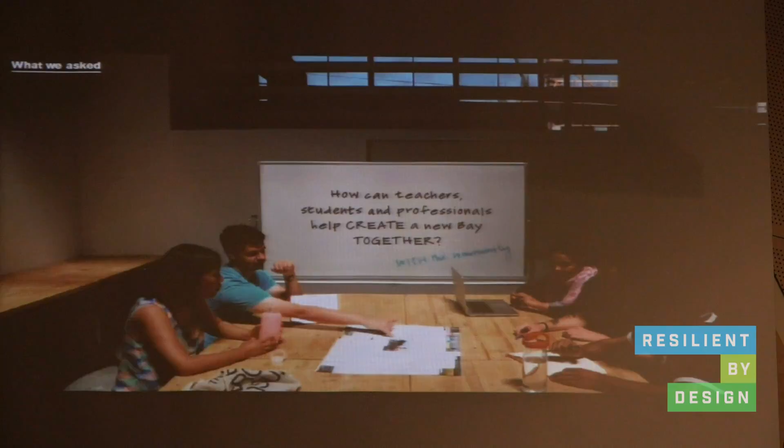And how can we do this together between teachers and students, professionals, and the communities? All of these questions, we want to dig deeper on those.

As part of the phase one touring and meeting with experts, we heard some amazing quotes along the way that, as we have our work sessions, we keep coming back to: a couple of big ideas that there is no shoreline, rather a shore zone. And we're a low-income community, and so the sad irony is that it's not our water, but it's flooding our homes. Those are really incredibly compelling ideas that have stuck with us and keep coming back to us.

So what do we do with those? We have been working in the studios and in the offices, in the neighborhoods.

Ultimately, though, we think it's not going to be any one profession, not any one community, nor any one generation that will solve these challenges. So what we really believe is at stake here, or the really big opportunity, is to create a new way of thinking about our relationship with the Bay, that can inspire everybody to get involved.

And that led us to an idea. There's a lot of complexity to all of these issues, and at 4 o'clock today you've listened to a lot of presentations. So I want to try something we've been excited about, sort of how you simplify this down into an idea that can get everybody excited. Let me give that a try.

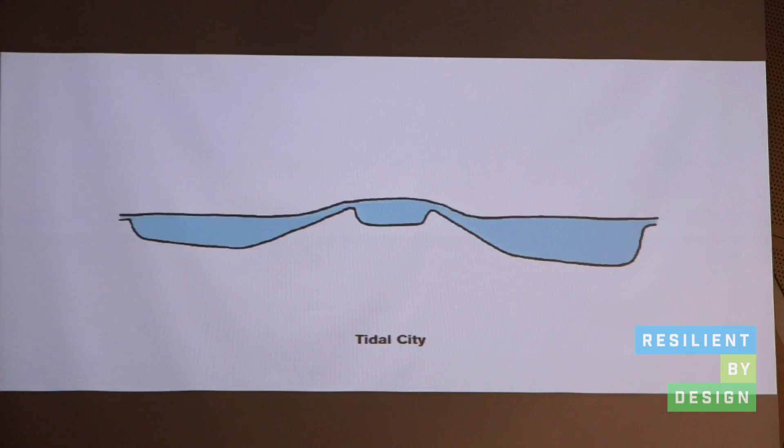So how do you live on the edge? What we're saying is that in a time of sea level rising, groundwater flood rising, we need to expand the edge of the bay to include both habitat and housing, for ecology and people living side by side. And we've asked ourselves how we can rethink the Bay Edge as a place where people and nature can coexist.

And then the second big idea is that in the 20th century in particular, we built these corridors to get us as fast as possible from point A to point B, and it ripped apart communities.

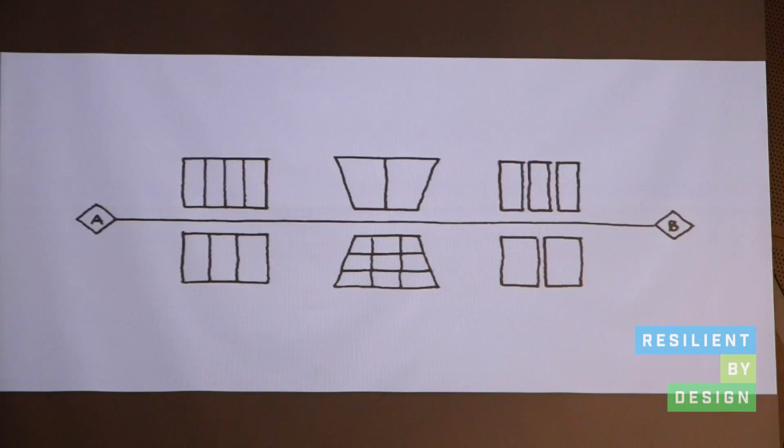What we want to do is rethink this. Right now we've got a huge challenge because all of those corridors have to be elevated and protected from flooding and seismic activities, and also modernized to accommodate new technology. So this is our once-in-a-lifetime opportunity to rethink those as a generator of jobs and housing, as a way to pull those communities together.

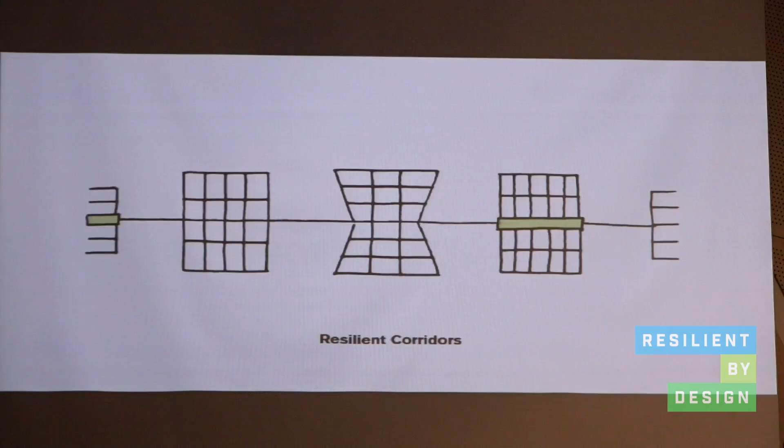So we call that big idea resilient corridors. The first idea was tidal cities. Second one is resilient corridors. And thirdly, it's an issue we've heard a lot about from different groups today.

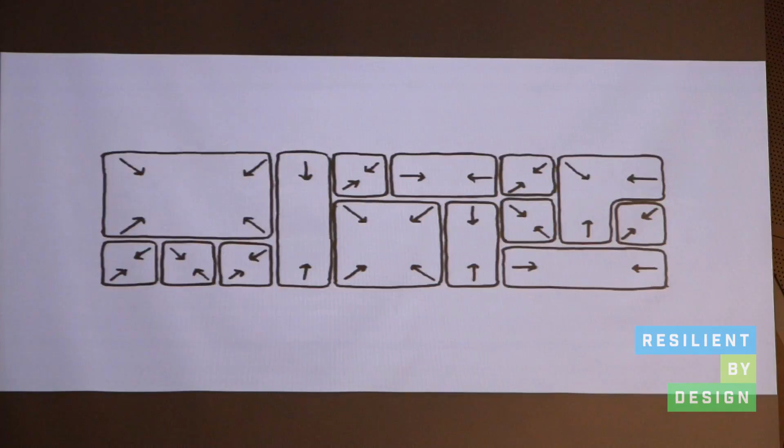Our take on it is that it's a governance issue. These natural and man-made crises don't respect the fact that we call one area a town and the other a city, or these municipal boundaries. But we and our policies do. So we need to think about new alliances among existing agencies and new partnerships between community advocates, residents, and stakeholders so that we can leapfrog these jurisdictional boundaries.

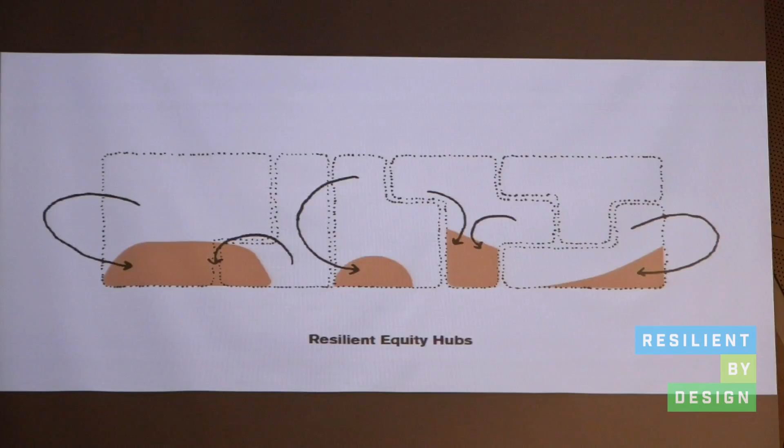And we call this idea resilient equity hubs. Now, all three of these are big, important ideas independently, but we really believe the real magic happens when we overlay them, and that's when we can transform our relationship to the Bay Edge and create amazing ways to stay and live on that edge rather than retreat or wall ourselves off from it.

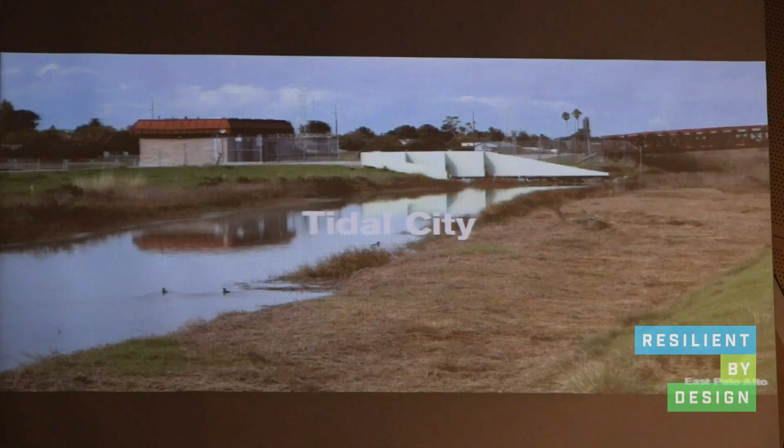This happens to be the pump house in East Palo Alto, which is pumping groundwater every day, whether it rains or not. We know that groundwater is going to be a big issue. We don't have a network of pumps that manages that for us—this is the exception, not the rule. So we're not ready for a higher water table, and we need to think about what that means.

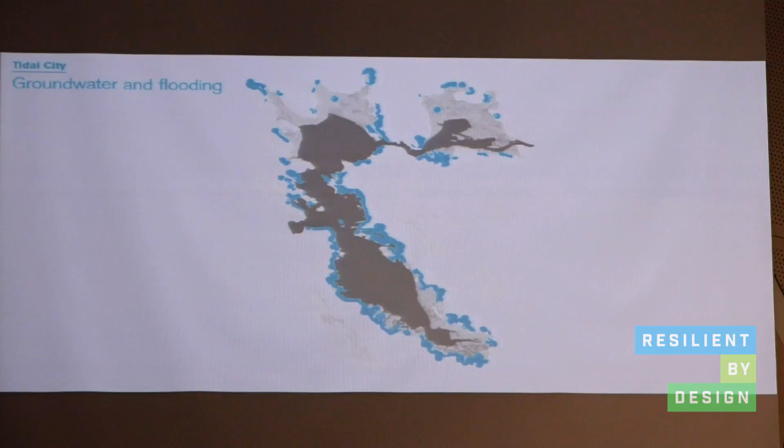So the research my group was doing at UC Berkeley was to map where there is a shallow water table in the Bay Area. This blue area on the map shows where the water table is within 6 feet of the surface, meaning that everywhere sea level rises 6 feet, all those blue areas would become emergent groundwater. That's a very serious problem—it would fill our pipes underground, expose buildings to mold, and could heave foundations. This is a very big deal in a region that hasn't had to manage this in the past.

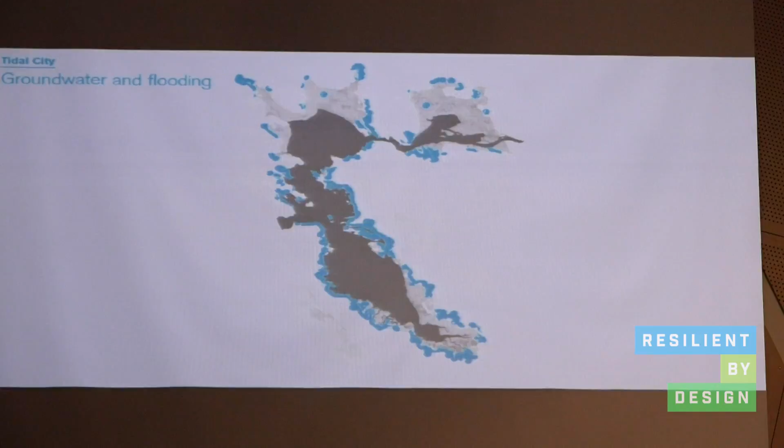It also increases our liquefaction risks. So in a seismic region, it's even more important that we understand how to deal with high water table zones.

So we looked for examples. We looked at Amsterdam and saw floating architecture. We thought, okay, this is something we could potentially use here in an innovative and different way, but using some of the same proven technologies.

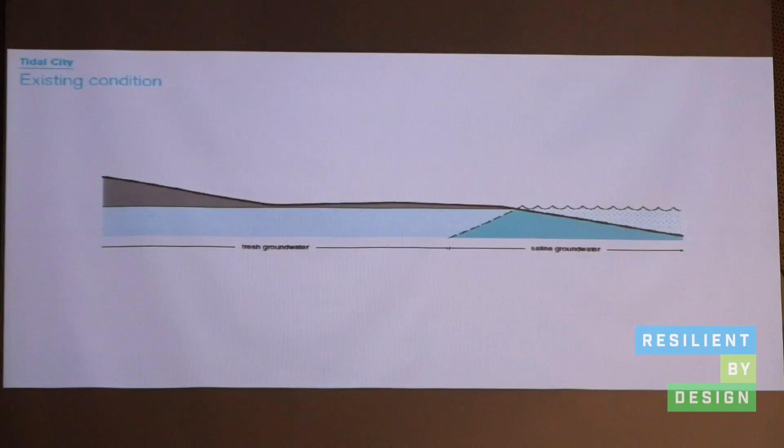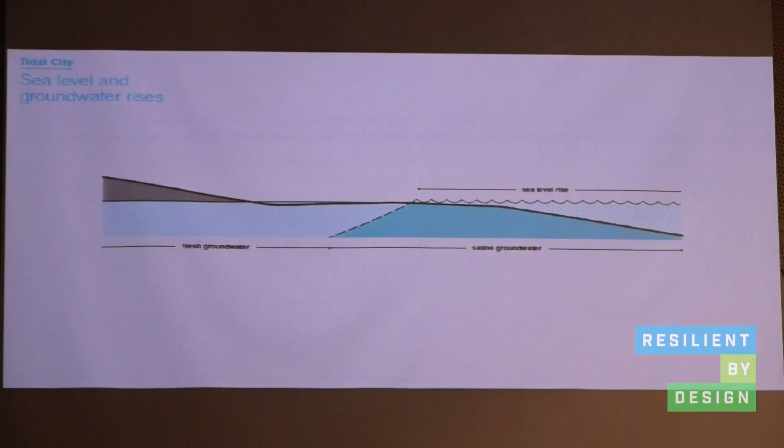The problem is, as I'll show in these sections, that as the sea level rises—dark blue is salt water and light blue is fresh water—we're going to see that light blue freshwater rise and eventually emerge on the land, even if we build levees and walls. East Palo Alto has a good levee, but still has groundwater flooding problems that the levee doesn't affect. So we need to figure out something that will allow us to address that.

One of the oldest ideas in landscape architecture is to dig a hole and make a mound. If we do that, we can balance our cut and fill locally and use the reshaping of the land as the primary strategy for how we continue to occupy these wet zones.

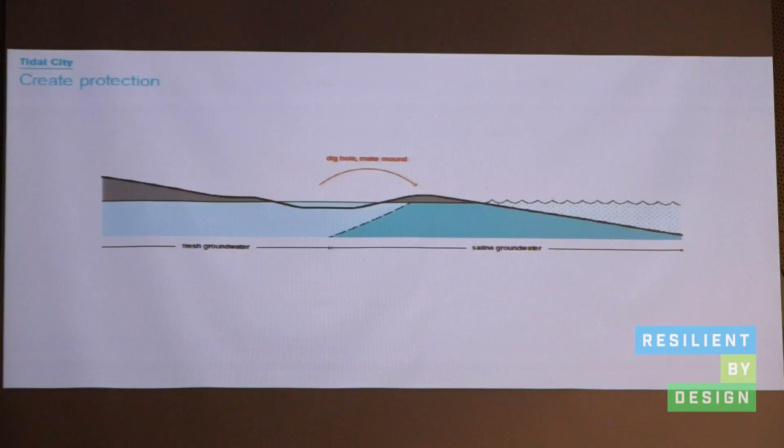We can build a wider living edge and at the same time use back bay lagoons and ponds to manage water flowing off the land, manage stormwater, manage creek flooding, and improve water quality before it hits the bay—and create value. It's hard to see here, but we would propose putting floating housing, stacked prefabricated units, with shared decking, Dutch style, in these back bay lagoons.

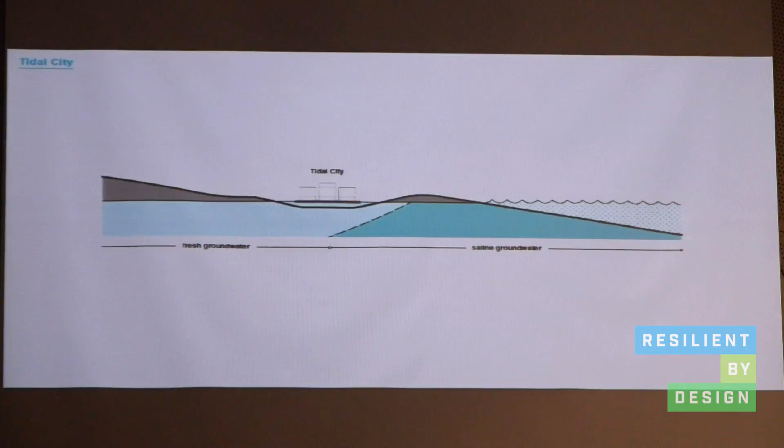This creates and maintains value, because conventional architecture will fail, and that will cause displacement. So we have to find a way to continue to occupy these places to adapt in place, and we can roll back with this strategy.

We can use a new hole and a new mound to fill the old pond and move back to higher ground if sea level rise goes beyond 6 feet. So we're trying to use a new problem to come up with a new solution.

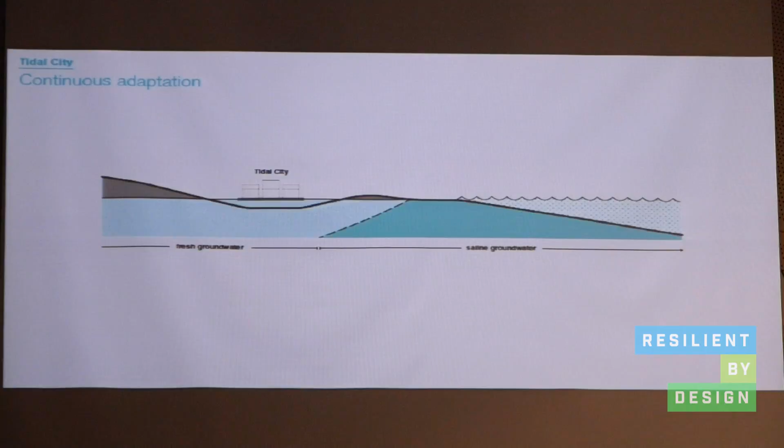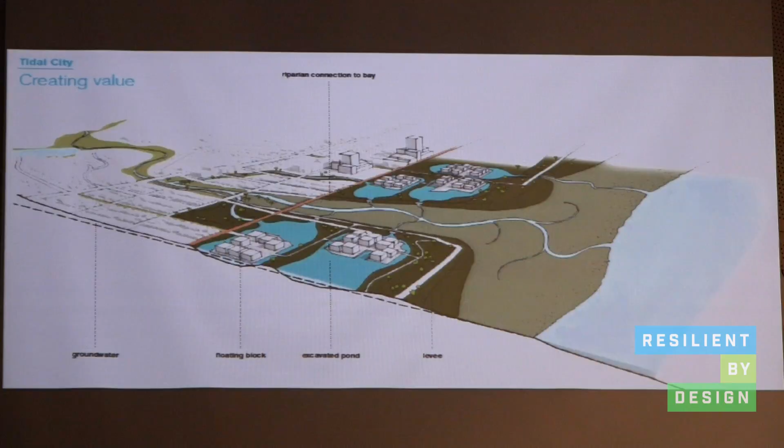And that illustration in the bird's eye view shows how a tributary might come through this band of tidal cities. We call it tidal cities because they're actually meant to hold the high tide with a series of gates and mute the tidal fluctuation. So you don't have to go up and down 6 feet every day, twice a day, but you can actually put floating structures on something that might fluctuate maybe 2 feet.

And then we think that these strategies for managing water will actually be vibrant urban districts. Someplace where not only can I live in one of those units, but I'm also doing a favor for the people around me because I'm holding their stormwater. So I'm living in infrastructure that protects my neighborhood. And we think that's a good deal.

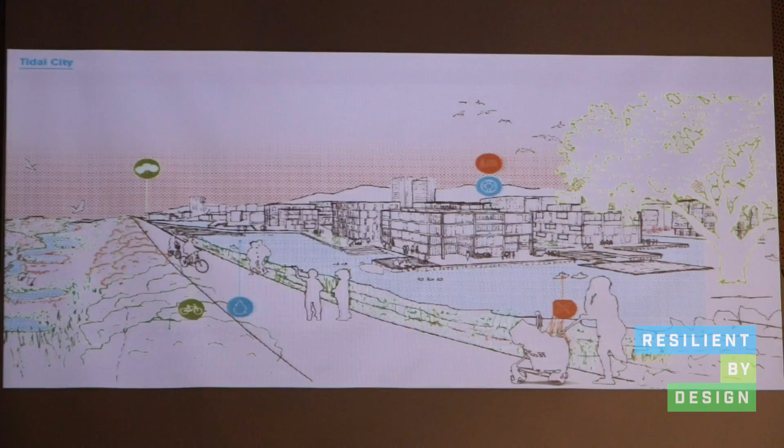So with that, I'll hand it over to Chris, who's going to talk about how we would connect ourselves within this wetter shore zone.

All right, Tidal City is an exciting vision for how we can truly live in the edge. Resilient Corridors is really about how we link the edge. It's about how we create connectivity and stay connected in an uncertain future, but also, and more importantly, how we create win-win solutions in a time of certain change.

So we all know that our existing transportation systems are already stressed and at capacity. That's obvious. Even without these new stressors, we have to do something. We also know that in many locations, our corridors are already vulnerable to tidal and storm-related flooding, and that in many locations, our corridors divide communities and sever important ecological connections between upland and bay. And so these issues will surely be exacerbated by climate change and population growth looking forward.

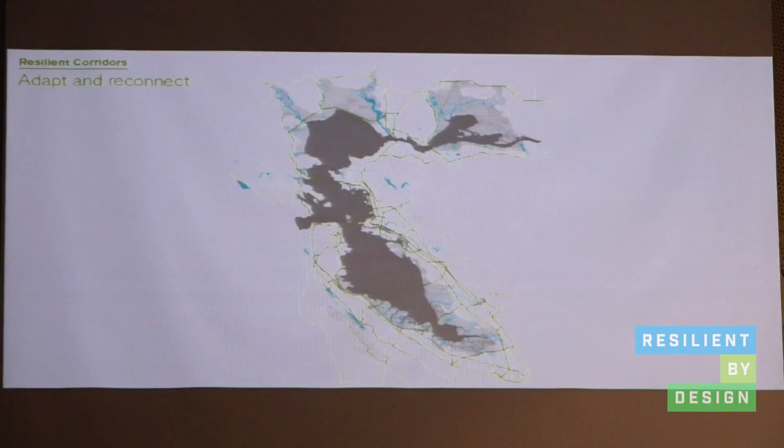In this simplified map, we've illustrated the level of impact of 6 feet of sea level rise on the transportation corridors that ring the bay and how they disconnect the various tributaries that flow from the highlands. Based on our analysis, we've identified that there's around 80 miles of highway that will be impacted at this stage, not to mention rail corridors and tributary streets that provide access to the highways.

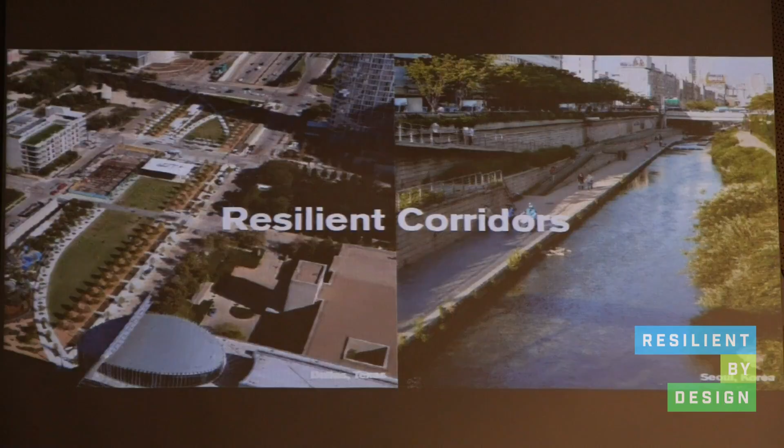So as we look forward and envision a more resilient Bay Area, we do have this incredible opportunity, if not an imperative, to rethink and adapt these corridors, to anticipate new transportation technologies and modes of transportation, to create and build new multi-purpose infrastructures that address sea level rise, seismic, and flood risk together, and importantly, reconnect our riparian corridors for greater social and ecological movement.

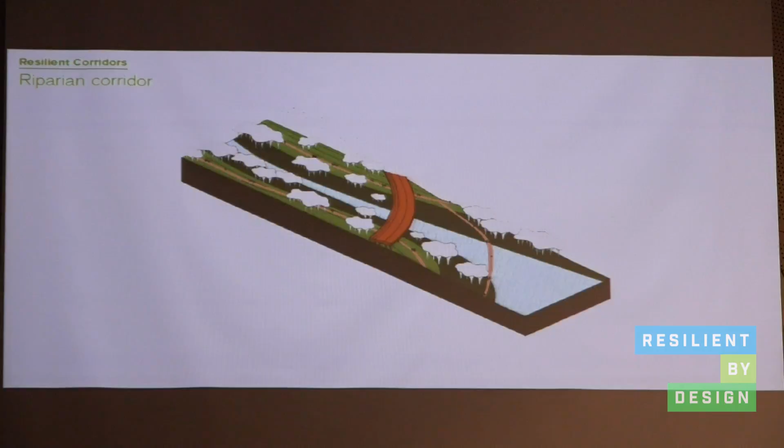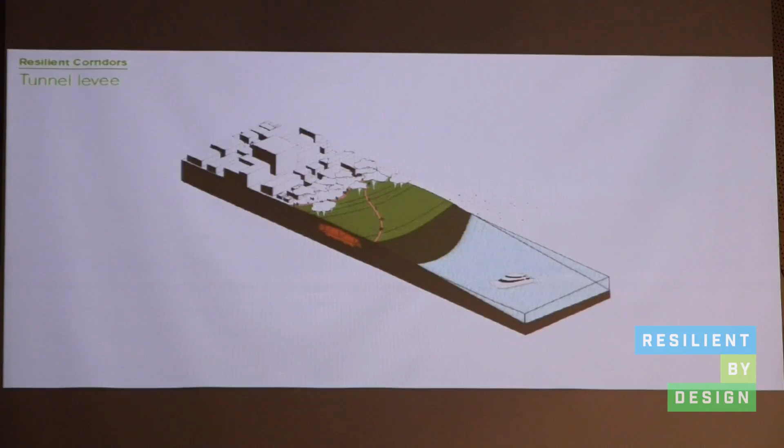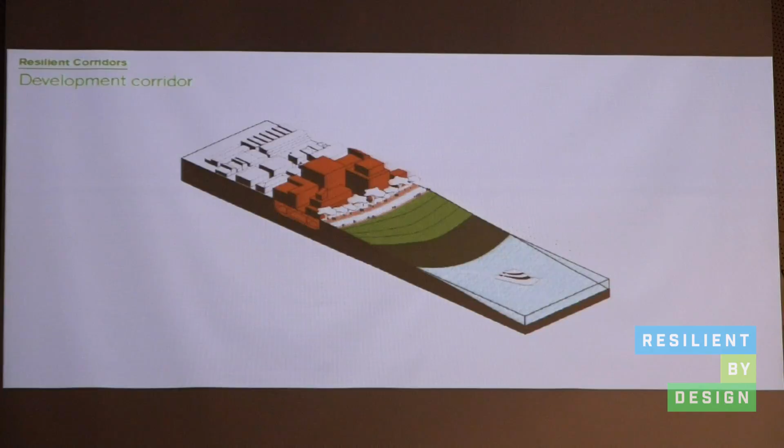So what if we expanded our tributary corridors, elevated freeways, and constructed highway mobility corridors in a new and more resilient way to allow for greater movement of flora, fauna, people, and water? Put the corridors in tunnels in select locations to create the back edge of a horizontal levee and protect inland communities. Or utilize the air rights of the corridors in select locations for transit-oriented development that can connect communities and in turn provide new points of access to communities that currently don't have it.

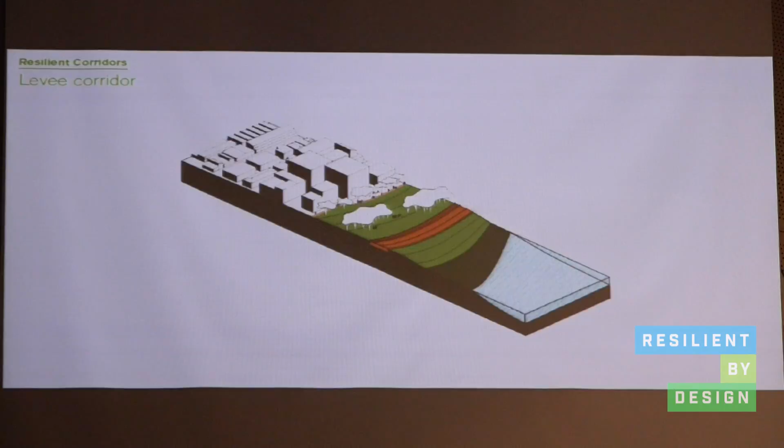Raise the corridors in select locations where we need to address sea level rise, but also take advantage of those situations to create bayside habitat. And lastly, and I think really importantly, create new corridors that fringe and connect across the bay while setting the stage for restored wetlands and wetland migration.

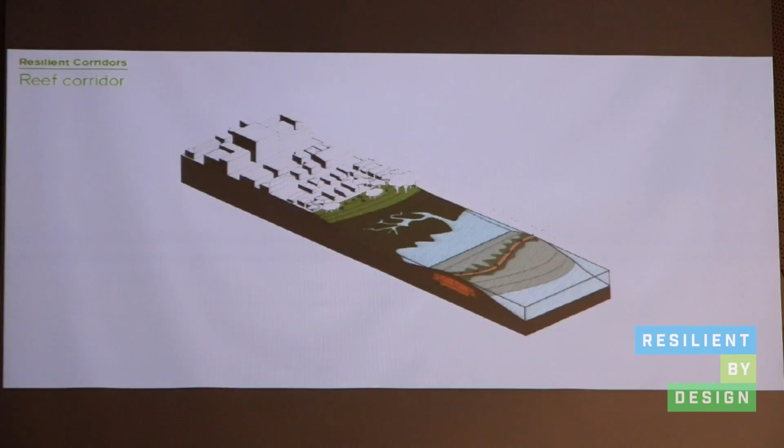So the challenge, of course, and it's a complex one, is how do we stitch all of these ideas together while maintaining existing connectivity? We know that these corridors are incredible assets, and the question is how we work within them to rethink them. This is, I think, a particularly compelling example of how we might do that on the 880 corridor around the Oakland Coliseum.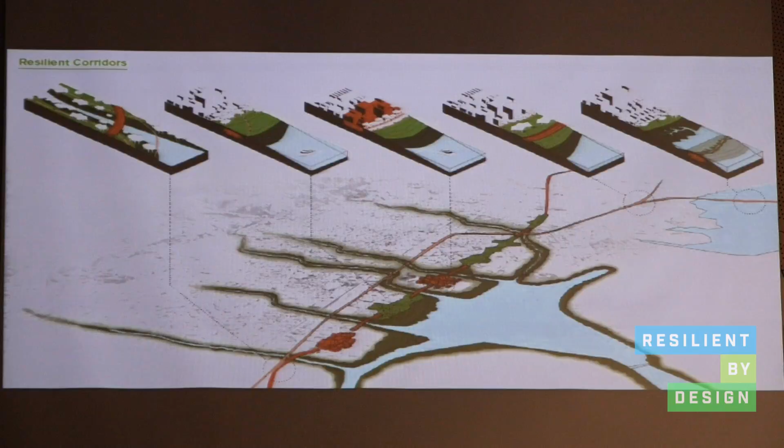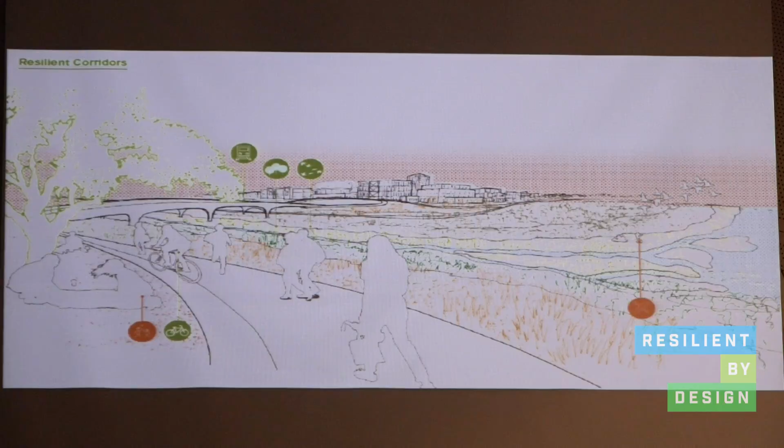And so just taking a closer look at that, what it might be like at the intersection of an expanded riparian corridor, a new transportation corridor, and shore zone improvements. So what all of these really point to is this nexus between regional resilience and local opportunity and communities. And it also points out this clear fact that in order for us to be successful, we need to find new ways to share and collaborate across disciplines, across jurisdictions, and within our communities.

Great. So our third idea is called Resilient Equity Hubs and focuses on governance and social equity. This map is hard to read precisely because it shows the tangle of jurisdictions, political jurisdictions that we have overlaid with watersheds. Maps like these remind us that natural hazards don't follow political boundaries, and yet because we make plans and budgets within these structures, we often lack capacity to address the scale and complexity of climate risk.

The issue here isn't any lack of public institutions. We have 9 counties, 101 cities, and scores of PDAs and PCAs. Nor is our only challenge a lack of will or resources. Though the cost of adaptation is daunting, we also have an extraordinary opportunity to harness the economic wealth of the Bay Area, the mandate created by Measure AA, and really the resourcefulness of local communities. So instead, we believe that one of our biggest challenges is a shortage of viable mechanisms for coordination.

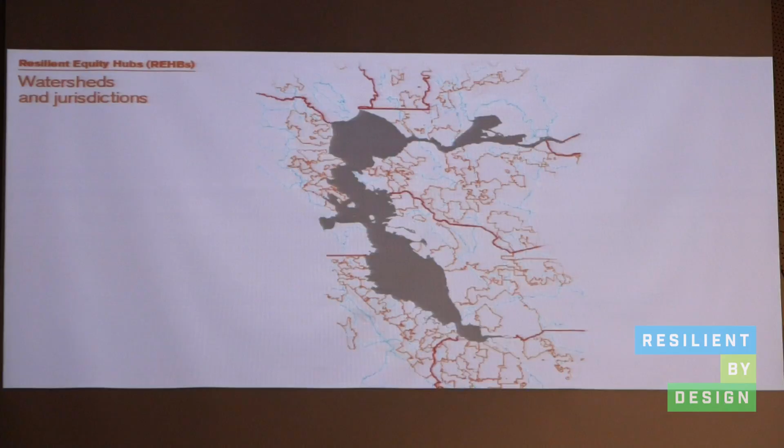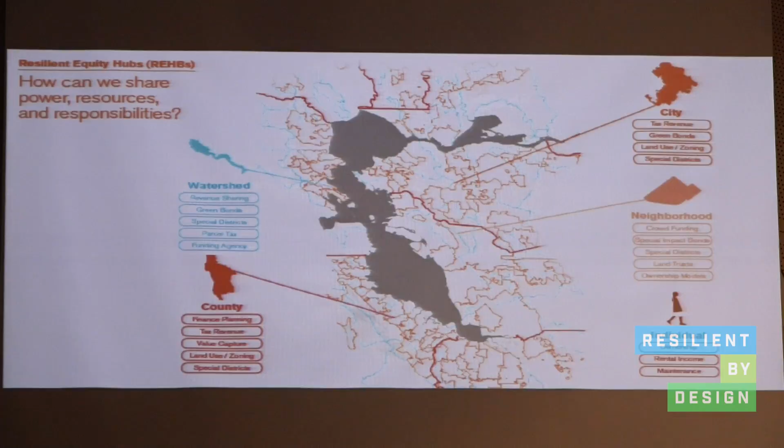So in response, we created a toolkit of governance and financial mechanisms that can connect to design strategies at multiple scales. For example, this could include the Geological Hazard Abatement District or a transfer of development rights to fund public infrastructure in a way that could relate to local crowdfunding campaigns. At the scale of the neighborhood, REHBs could also create incremental change as a process stewarded by local partners.

Phase 1, for example, could identify where a high groundwater table overlaps with vacant or government-owned sites. Phase 2 could build the tidal city approach that Christina just described, bringing in higher density, affordable housing within these sites.

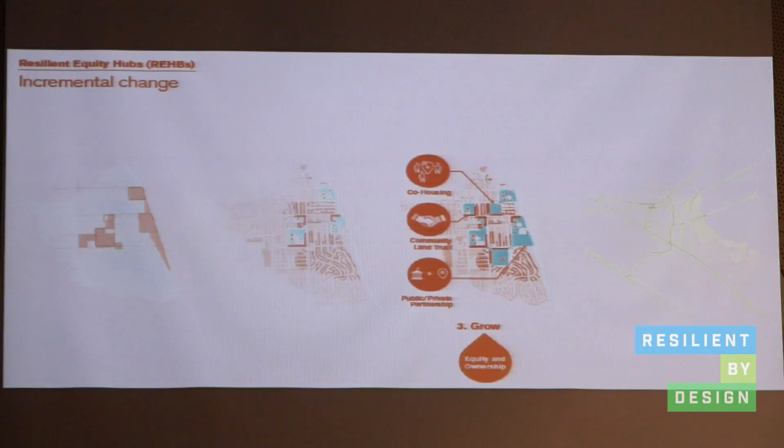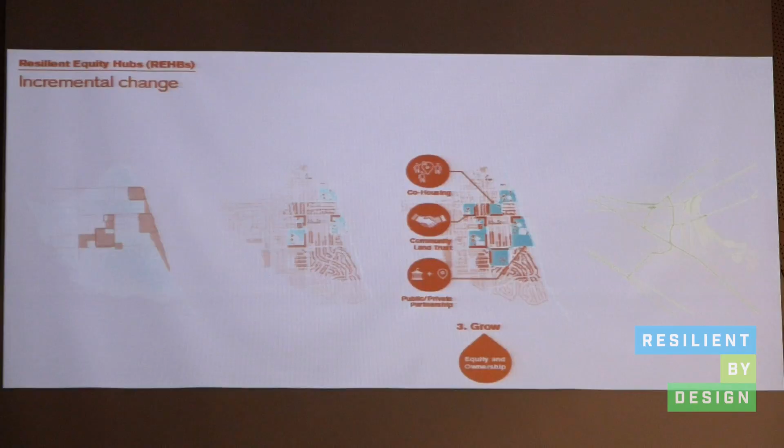And then phase 3 would really start to work across property lines, forming cooperative ownership models such as co-housing or community land trusts. Spatially, this can create a kind of adjacency across diverse landscapes, using ponds in one location to alleviate groundwater pressure in others, or storing water from a network of green streets. Then phase 4 could really scale this up and realize the resilient corridor ideas that Chris just described.

At the scale of a few city blocks, we could see this through the way that district heating or gray water recycling could connect new and old houses. Cooperative ownership could provide intergenerational care that can allow a single parent to go to work, as well as things like barbecues and tool libraries that could build social resilience among neighbors.

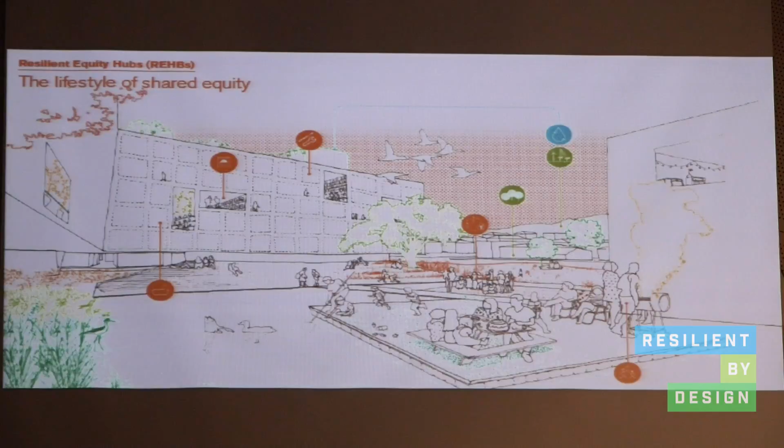All right, so the 3 ideas we've just presented complement each other. Through tidal cities, we live with water. Through resilient corridors, we stay connected. And through REHBs, we make change possible for all of us.

We've identified sites where there's a strong overlap between groundwater risk, transit vulnerability, and under-resourced communities. This led us to San Rafael Bay, San Leandro Bay at the Oakland Coliseum, and East Palo Alto Baylands. Each of these places brings together a complex mosaic of cultural and ecological vitality, and we're really excited about the possibility of creating a new kind of resilience hub with these communities.

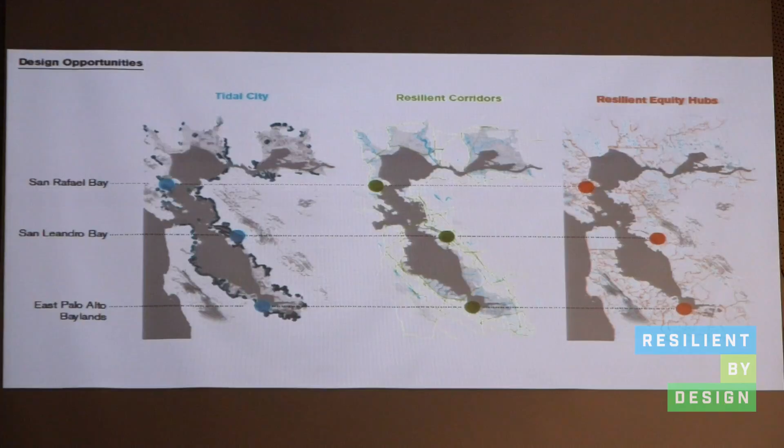So let's start with East Palo Alto Baylands, where sea level rise affects the very fabric of one of the last affordable cities in Silicon Valley. Though EPA is protected by levees and a healthy tidal water wetland, it's also vulnerable to flooding, which you can see in the dotted line, and groundwater inundation, which you can see in the blue dots. To address these issues, we've identified places where these 3 ideas can make the biggest difference.

So tidal cities can bring about adaptive change to groundwater flooding. In green, public transit could start to reactivate the Dumbarton Corridor or ferry service at Cooley Landing. And then in orange, REB tools could fund projects like this, maybe coordinating efforts with the San Francisquito Creek Joint Powers Authority.

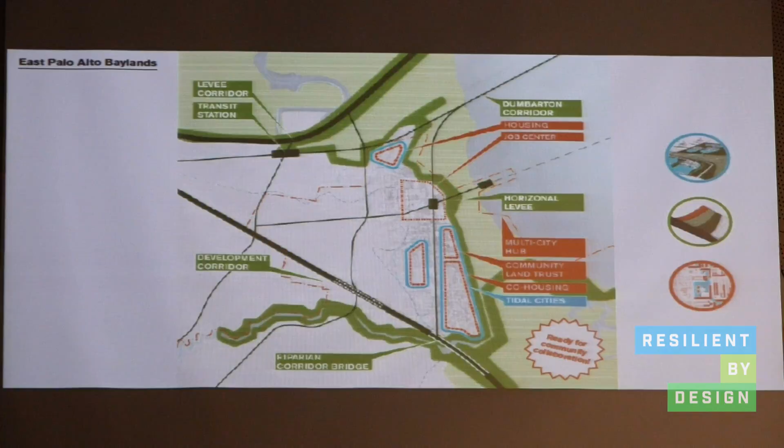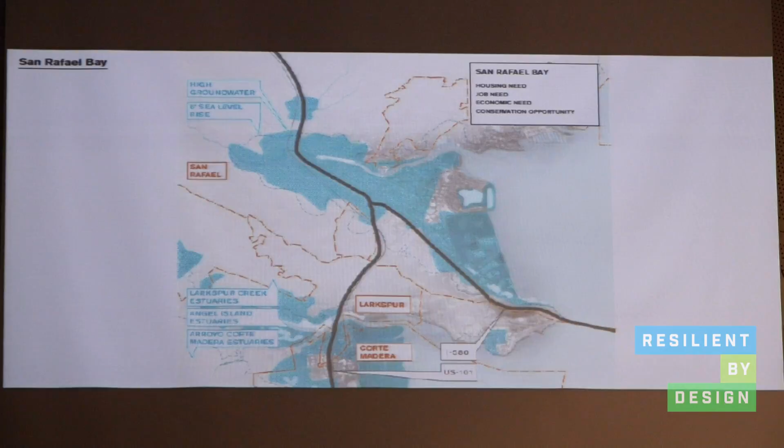San Rafael residents too face significant challenges and opportunities and are really uniquely perched on an edge. San Rafael's downtown is built on tidal marshes and is vulnerable to flooding, groundwater inundation, and liquefaction. So in response, we've identified places in which a much more adaptive approach can protect from both rising tides and rising rents, and basically connect back into habitats, job centers, and neighborhoods.

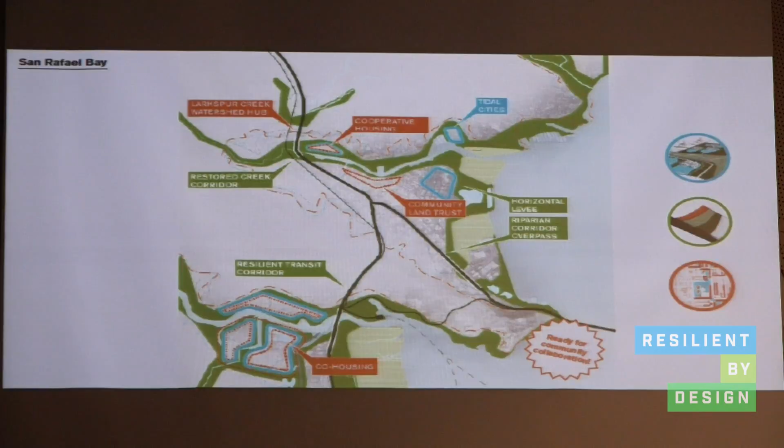Lastly, at San Leandro Bay and the Oakland Coliseum, you can see a real confluence of these questions, from Arrowhead Marsh to the Coliseum, and then across the BART tracks to the International Boulevard. And as the sports teams move out, this site will change. We have a once-in-a-generation opportunity to activate this public land, industry, logistics, transportation infrastructure that are all concentrated here.

And to do so all in a way that residents can benefit from this wealth of resources. We heard about residents' sense of disconnection from jobs and the waterfront here, and as the site changes, it's really important to get this right.

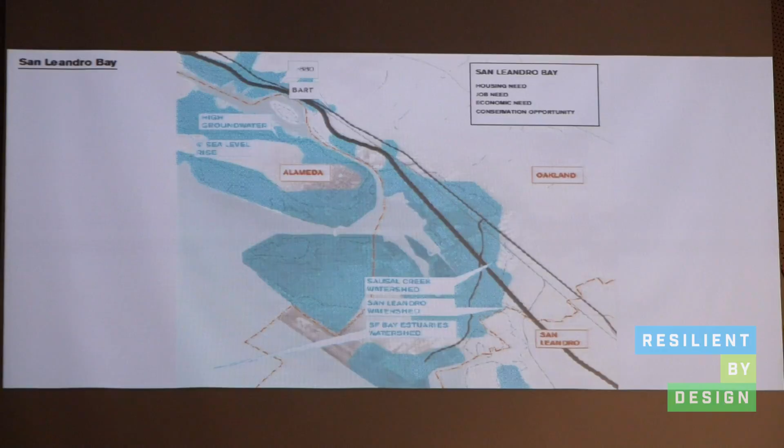So then our approach was to look for interdependencies across the San Leandro Bay area in a way that can connect tributaries fully to the bay, to use the Oakland Coliseum site as a pilot site for this high-density tidal development, and start to link these neighborhoods. So by drawing resources into communities, we can build on community advocacy that's happening today with a long-term vision for the future. And Stephen will wrap up with that in mind.

And step 2 is to embed into this process tools that all of us have created for very important public projects, things like Game of Floods, triple bottom line analysis, and a social equity checklist that we've already worked with some of the experts on in the community. So that would form the basis of our partnership to co-create these projects. So with that, thank you very much, and that's it.